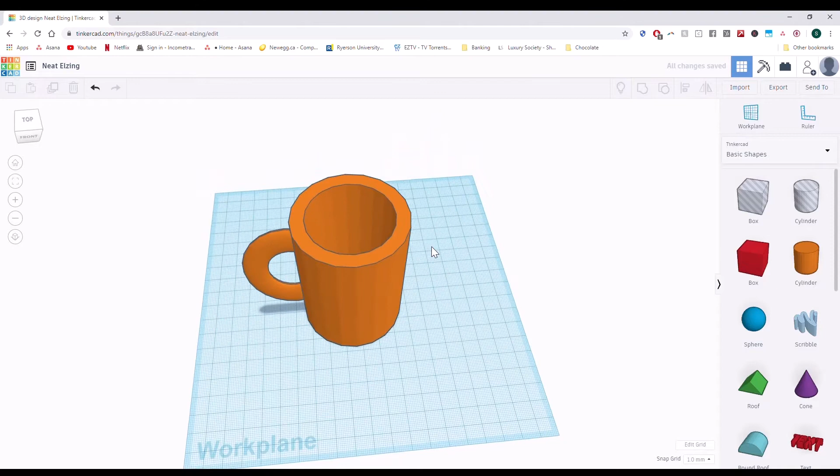Now, if you remember, I said earlier, why do we make the hole last and not the handle last? Well, because if we make the handle first, as we just did, we join the body to the handle, and when we cut the hole, we cut it through both the handle and the body of the mug.

But if we do it the other way around, let's say we made the hole first. So I made the cylinder here, okay? I made this, let me just show you. So let's ungroup this twice, right?

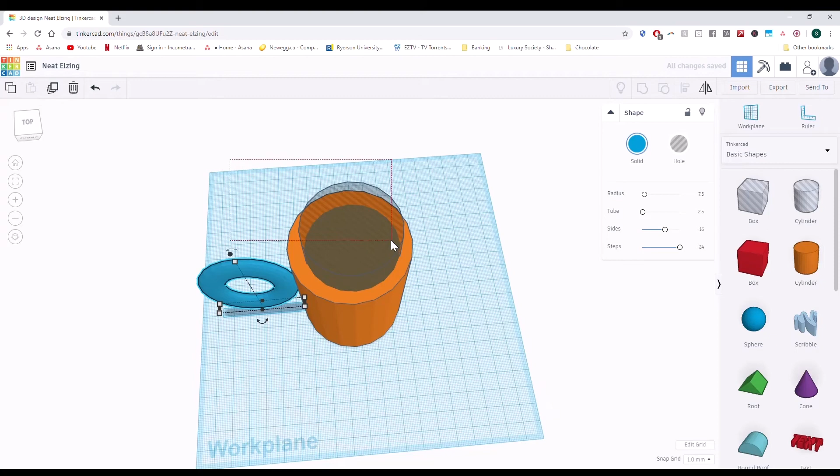Now let's do it the other way. I'm gonna make the hole first. So I've got my cylinder here. I make the hole first in the body here. Group that. And now I add my torus where I want it. And I join this object.

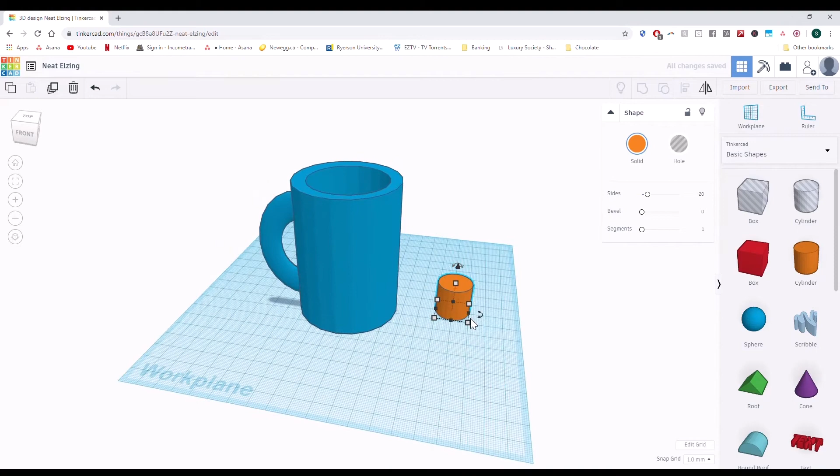Right? What's the problem? I have to make another hole now. So that's a whole third step, and it's actually multiple steps because now I have to cut out the arm of the cylinder that I left, and that means I might as well have just not made this hole in the first place, right? So let me make the hole again, turn it into a hole.

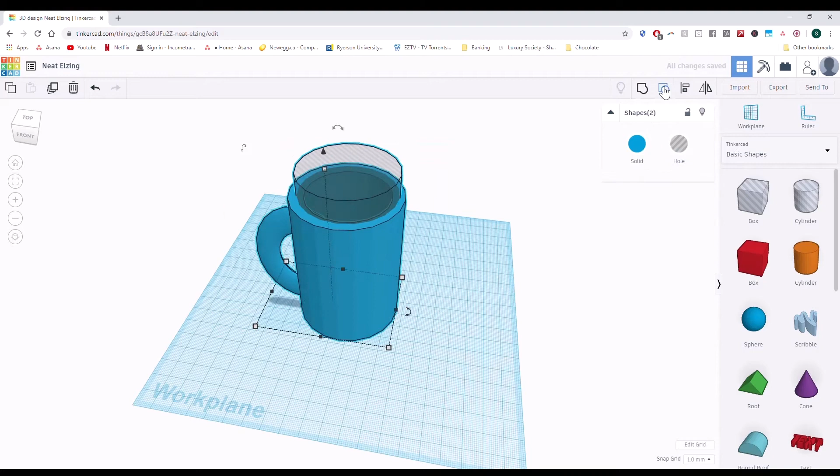Okay, and so the order in which you do things in design matters for almost every software. So you always want to think beforehand, plan out, what am I going to do? What's the order? How will it affect me? And am I adding unnecessary steps? Okay, so now my mug is a lot uglier, but you get the gist.

We've learned today what not to do. All right, so I hope you've enjoyed this tutorial. This is a basic, very basic touch on how to use Tinkercad, but you will be able to create 3D objects that you can print using Tinkercad, using some things I taught you, and using some things that you should watch for when 3D designing.

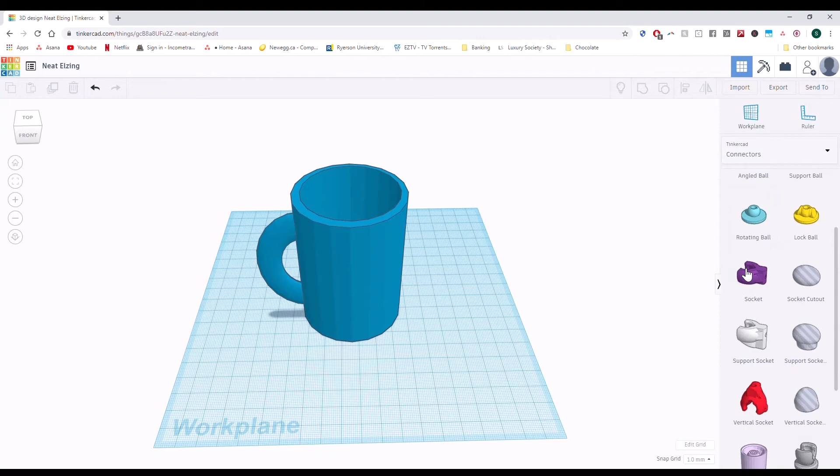Okay, lastly, I want to show you some other shapes that are hidden that might come in very useful. So if you go to the section over here, this drop-down menu shows connectors. Very important section. When you're making objects that you want to connect to other objects, these are just an easy drag and drop way of doing that, right?

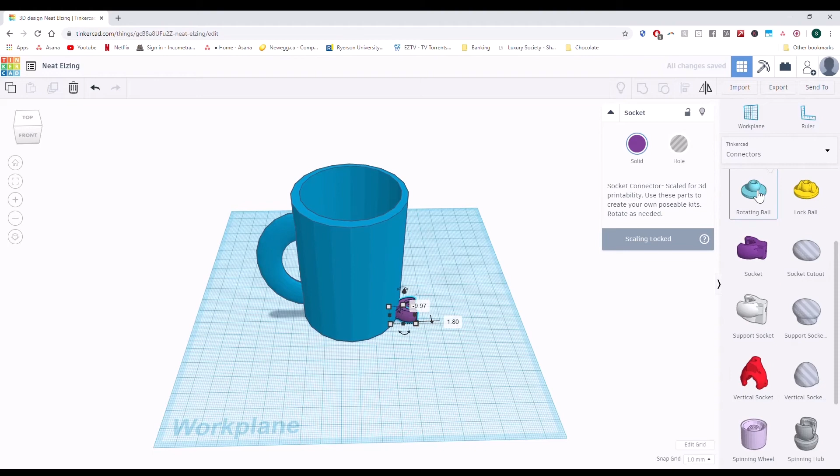Say if I was going to add something that would connect to this mug, right? Let's say if I wanted it to hang off of a mount, a wall mount, then adding this to my cup and then adding the other connector, say the rotating ball, to another object would be very easy doing this.

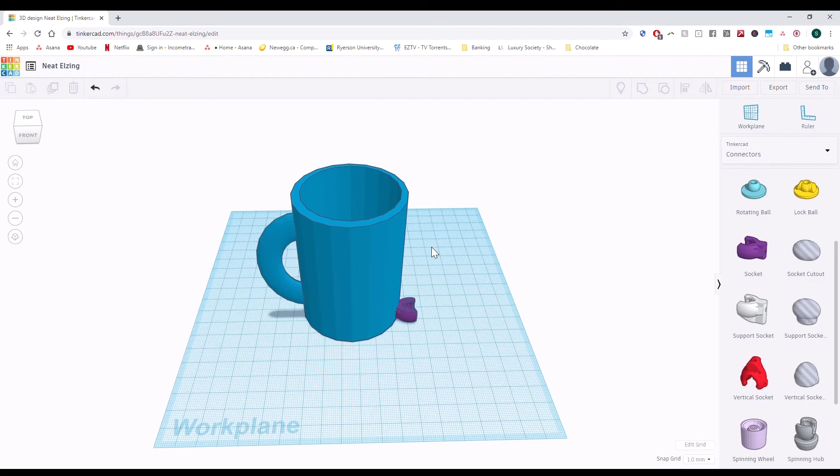But keep in mind, when you actually 3D print, you want to make things slightly bigger. So you want to make this slightly bigger than the rotating ball that it would be attached to, because the plastic shrinks. Okay, so when designing for 3D printing, those are some kind of things you're going to find out by trial and error.

But I just wanted to show you this important drop-down menu, because there's a lot of things hidden here that are already made for you and that you do not have to start from scratch, like glasses, hats, you know, things that you might find useful to make all sorts of fun toys and characters.